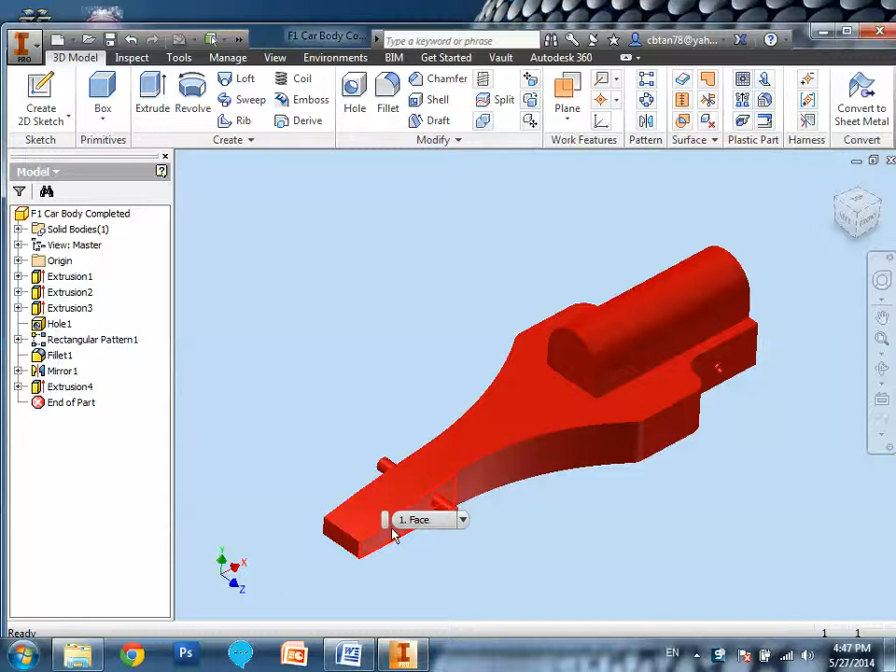Okay, so back to this part 2. We are going to create a front aerofoil and a back aerofoil. So what you can do is this. I think I'm going to create this separately. I'm going to select this surface and create a new sketch.

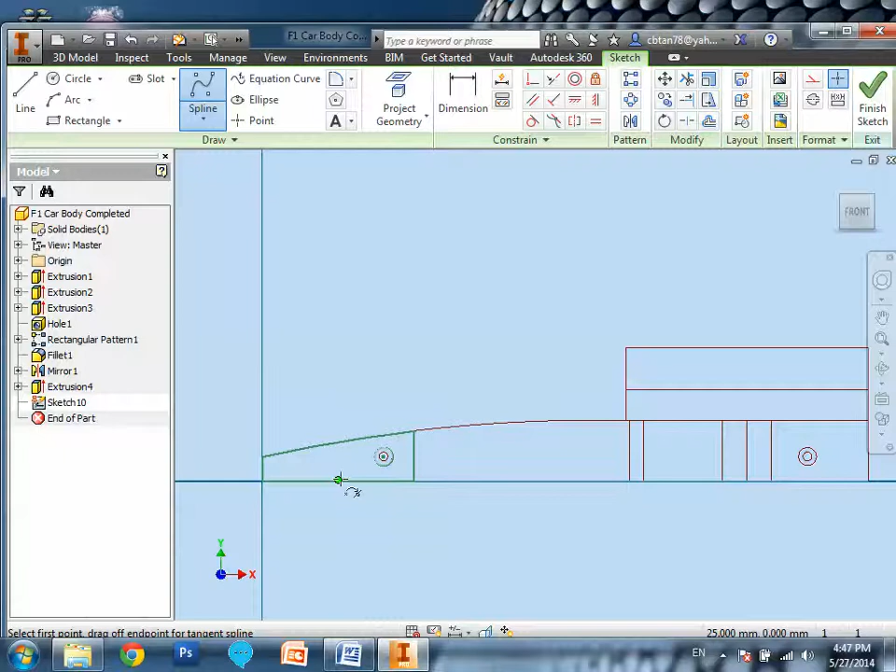Okay, let me go to a transparent view. Okay, now, sorry, let's try that again. Right click, new sketch. Go to spline tool and draw an arc like that. Okay, once you have finished, click on the finish button.

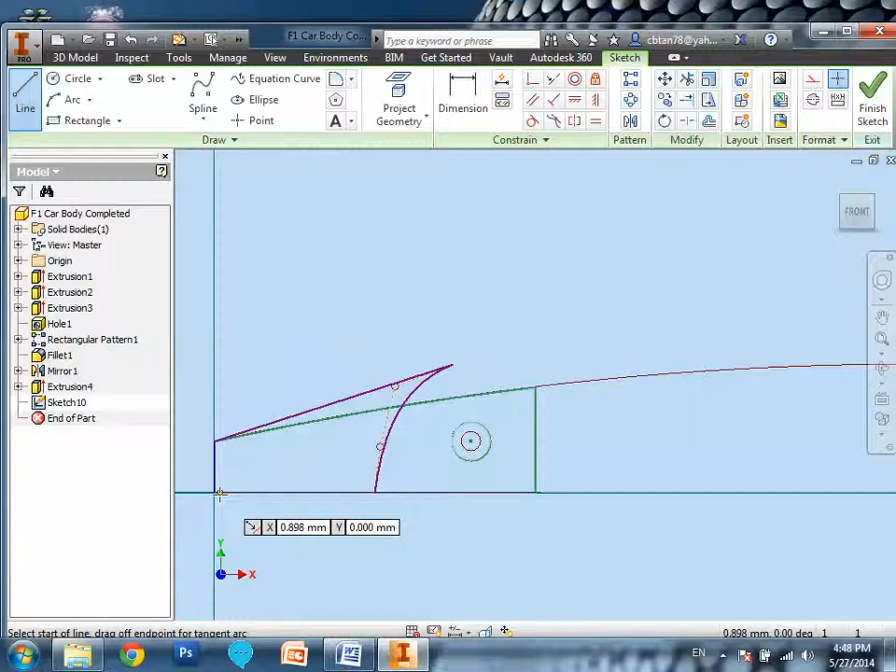Now your shape is not closed. We're supposed to draw this, so you join up to the front here, and back. Okay, oops, this line is not closed as you can see. Okay, once this is done, press the finish sketch and you're ready to extrude.

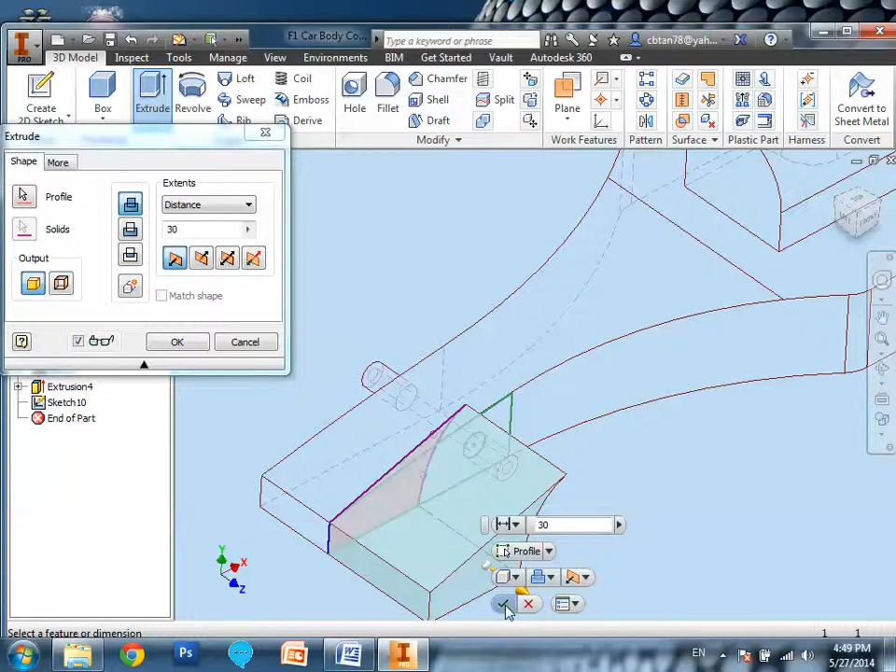Okay, are you adding or are you subtracting? Adding, so make sure this is added. According to the instructions, it says that you must extrude this by 35, I think. Okay, wait, I think it's 20. Let's try 20 or 30. Okay, once this is done, press the green tick to confirm.

Right, next thing, we are going to do the rear aerofoil. So the rear aerofoil, we will have to, let me save my work first. Okay, so we are going to go to the XY plane here, right click, new sketch.

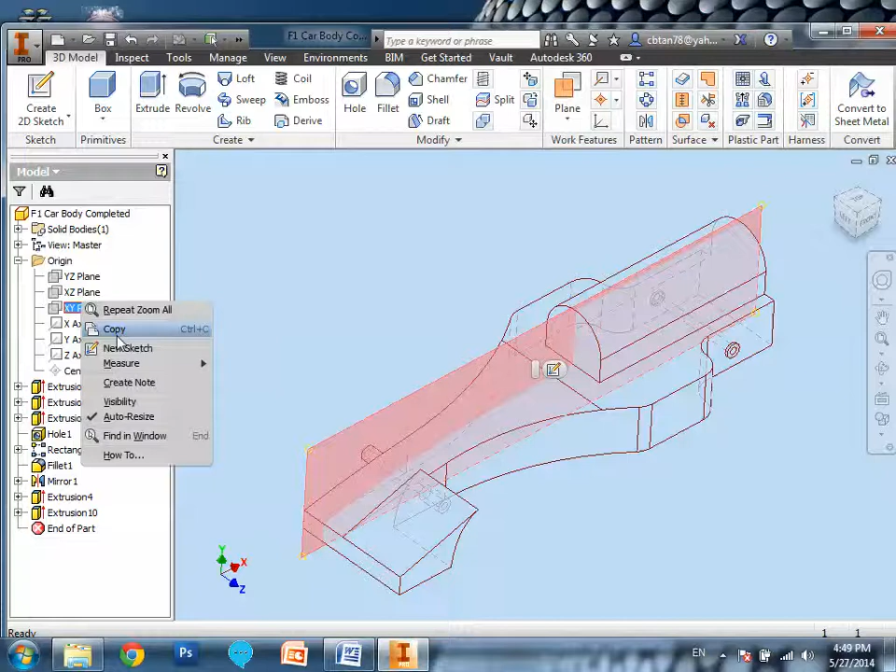Okay, we are going to draw a simple one. We're going to draw just an ellipse starting from here. Just something like that, simple one. Press the finish button. Alright, and we're going to extrude this by 35. Okay, can you see? Extrude by 35. This is 35. Press OK.

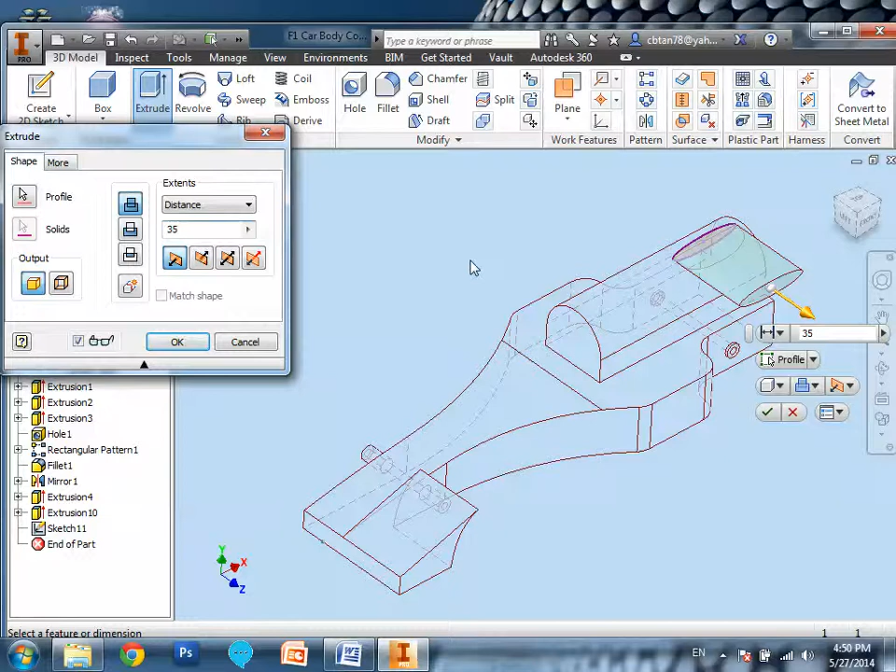Now, of course, you've done it on one side, you must do it on the other side. What's the feature that allows you to do on the other side? Mirror, yes. So go to mirror. Are we extruding a feature or are you extruding a solid? Feature. We're doing a feature. All these are feature. Feature 1, feature 2.

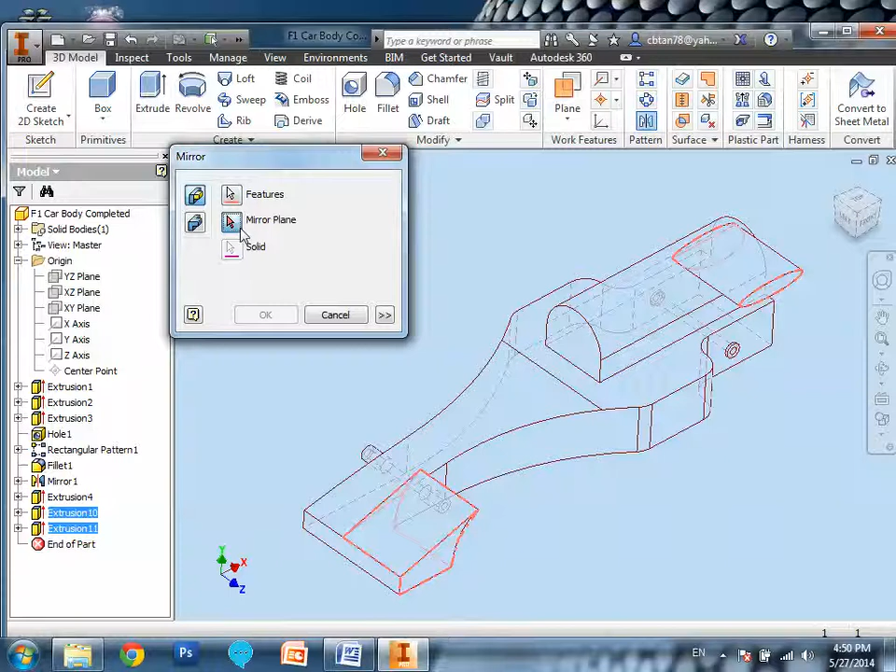Can you see? So you must click on the feature. Sorry, click on the feature. Click on this feature. And this feature. Select the two features you want to mirror. Click on the mirror plane. Where is the mirror plane? This one, right? Click on this and you see your preview appearing. Once you see the preview appearing, you are safe. Click OK to finish up.

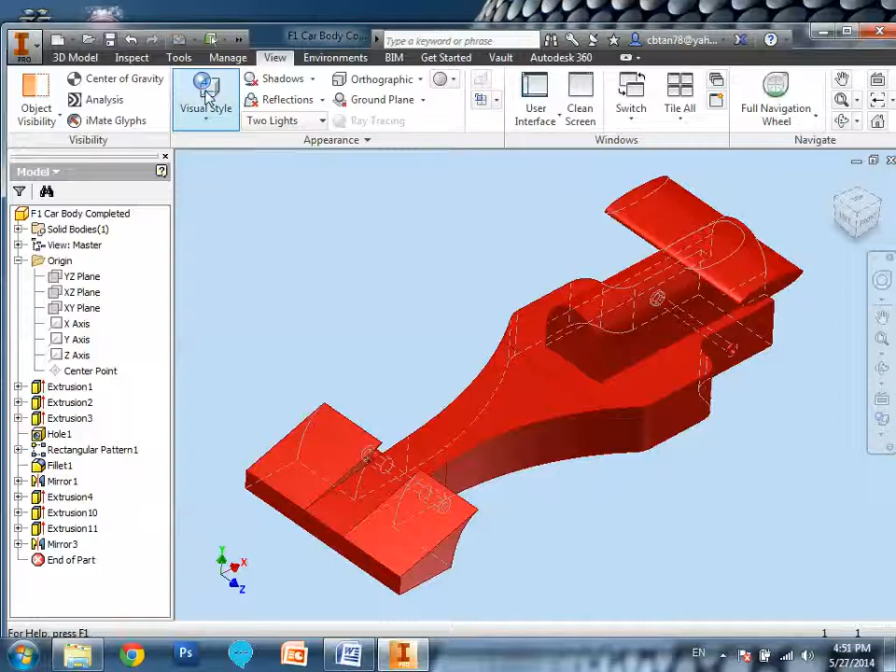Alright? So, more or less, it's almost done. Yeah? Almost. It's not done yet, but it's almost done.

Okay? Last step. We will need to create a little hole behind. Okay, for the canister. You do remember that the car behind has a canister. So go to the back of the car, right click, new sketch, go to circle. We're going to draw a circle.

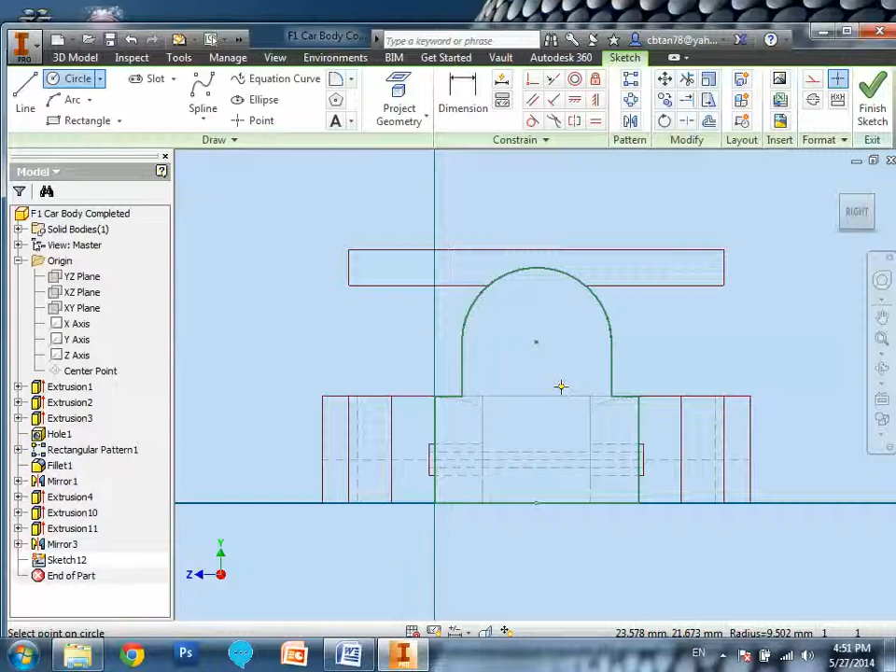Now the hole is a standard size 19 mm. So dimension this to 19. Right? Finish the sketch and extrude it. Are we cutting or are we adding?

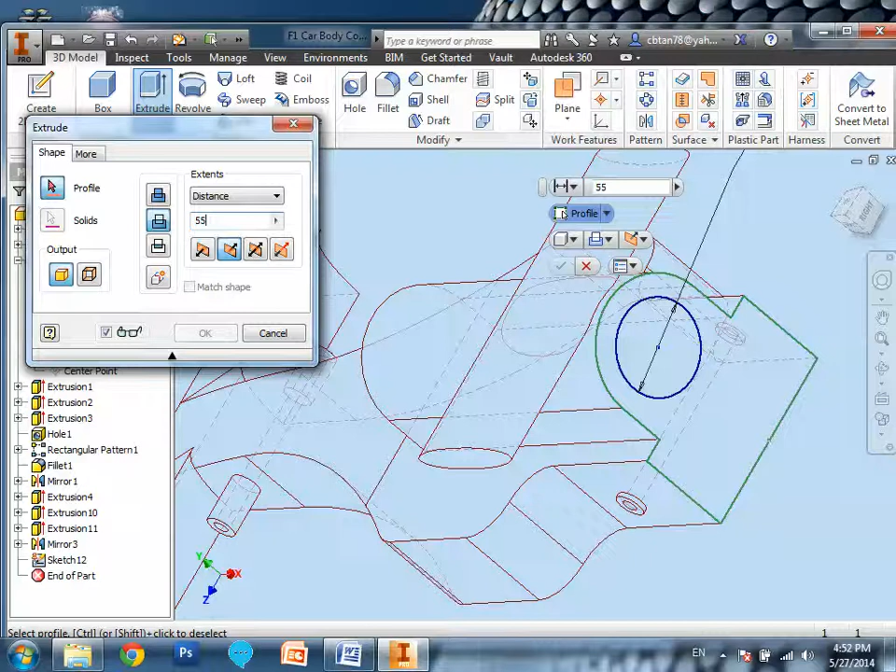Cutting. Now the hole, according to this, the hole is according to my understanding is 55, yeah? Because last time we always do 55. Okay, so you need to extrude this 55 in. Select the part that you need to extrude, then press OK. Right? This is for your canister hole.

Now you look at this. This part is super not aerodynamic, right? If you understand aerodynamic, you look at this. When the wind comes, it's going to knock against this, and then the air is going to be disrupted all over the place. You need to make this slope.

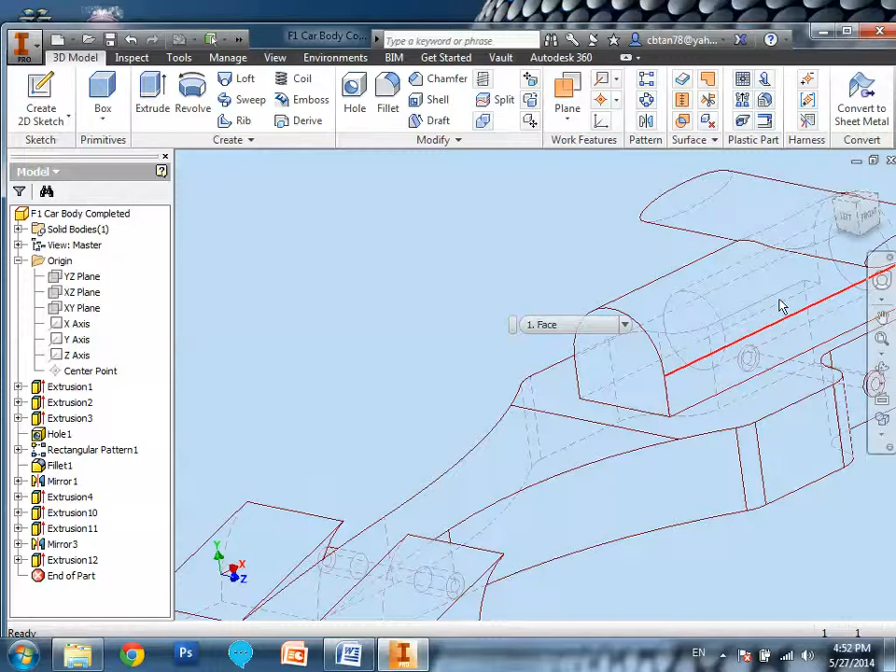Okay? How to make it slope? Quite easy. You can actually go to the XY plane. Go to the XY plane, right click, create a new sketch. Okay? This is what we're going to draw. We are going to draw this, starting from somewhere here. 1, 2, 3, 4. We're going to cut this away.

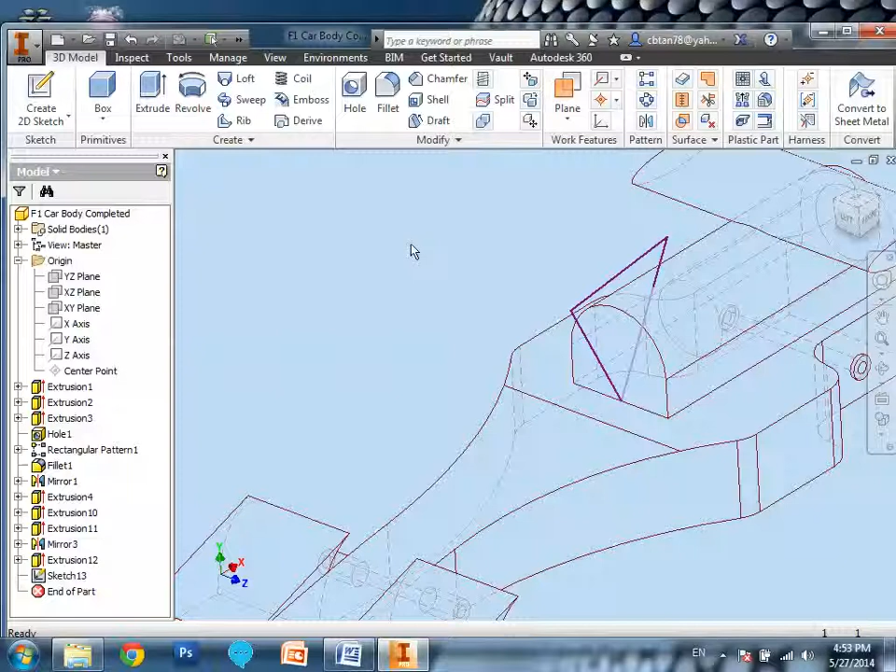Can you imagine what happened when I cut this right-angle triangle away? I'm going to create a slope, right? A simple slope, as shown on page 25. 24, 25. You see 25, first diagram? Page 25, first diagram there? You see the slope there?

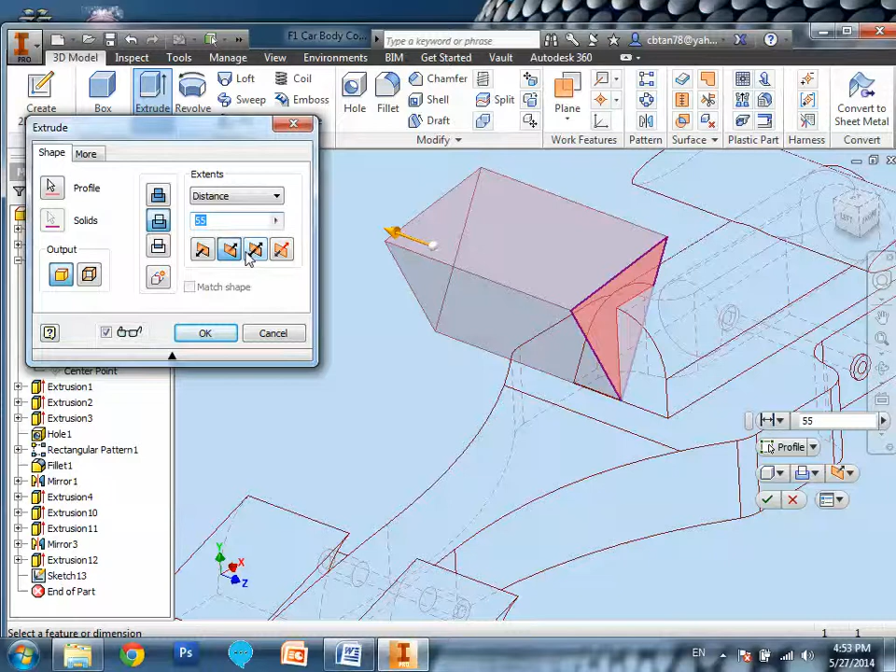Extrude, cut. But you see, no matter how I cut, it only does one side. So if you want to cut on the left and the right, you need to select the third icon that says symmetrical. If you select this, it cuts here. You select this, it cuts here. You select both, it cuts both sides. Press the OK button, and it's cut.

Now, last step. The aerofoil. Now you look at this aerofoil. My aerofoil is a little bit different from theirs.

Right, last thing. Can you see that there's a small little so-called edge there? So that's what we're going to do. We're going to create a new sketch here. If you look, everything follows these 5 steps here actually.

Okay, so let me save my work first before something happens. Just to let you know, my software had never crashed until today. Got infected by some of your PCs. So I can talk, you cannot talk, please.

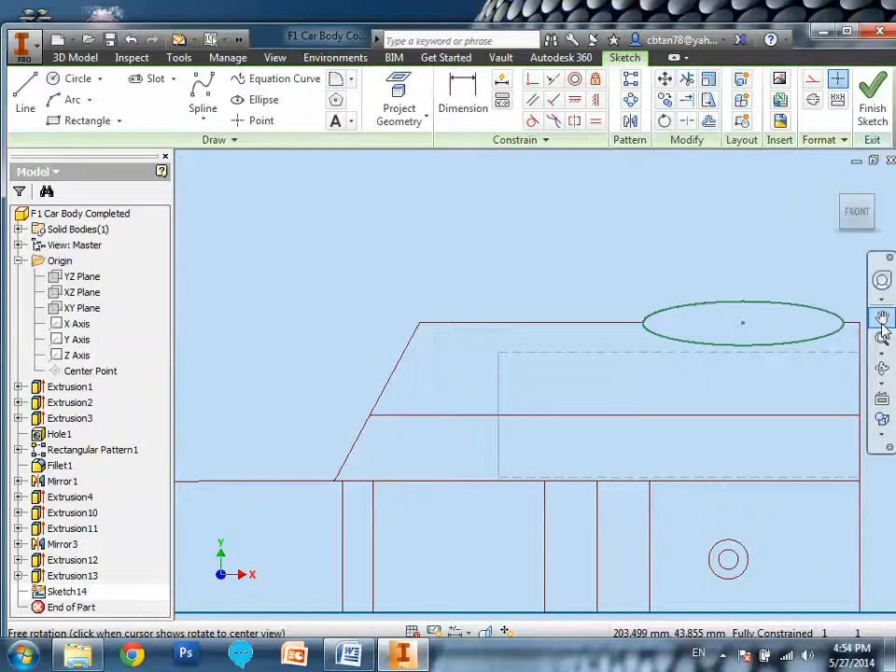Right click, new sketch. What we're going to do is create another ellipse, slightly bigger than the original one. Press OK. What are we going to do? We are going to extrude. Of course, not so big, please.

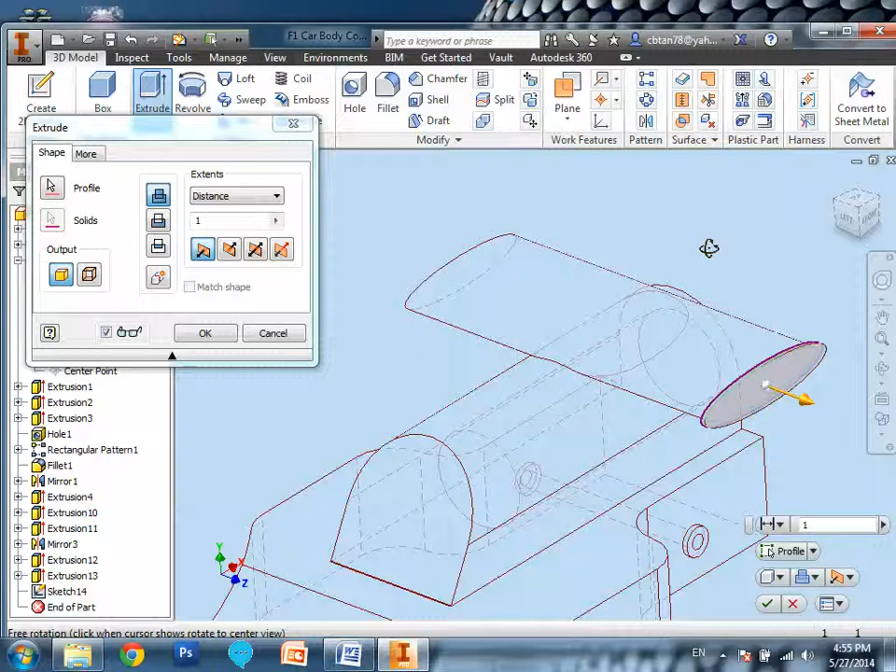It will be about maybe 3mm. Let's try. Maybe too thick. Maybe 2. Okay, 1. Let's try 1. 1 is 1, 2. Yeah, I think 1 looks good. Or maybe just put 2. I think 1 is better. Okay, then you press OK.

That's it. Right? Now, how to be a master? Let's say if you don't want 1mm, can you repeat the process? You can actually go to the last extrusion, which is number 14. Right click on the extrusion, go to edit feature, change this to 2. It will become 2.

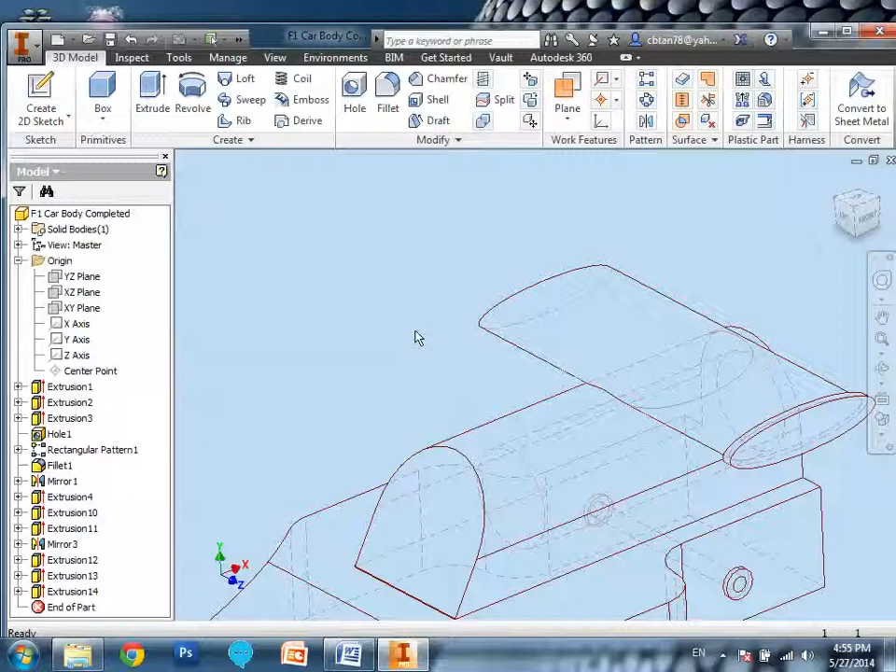Now, next thing, mirror. Same thing, mirror. Are you mirroring a feature or mirroring a solid? Feature, yes. So click on the feature button, click on this feature. Then you tell the computer your mirror plane. Where's your mirror plane? XY. The preview will appear and you press OK to confirm it.

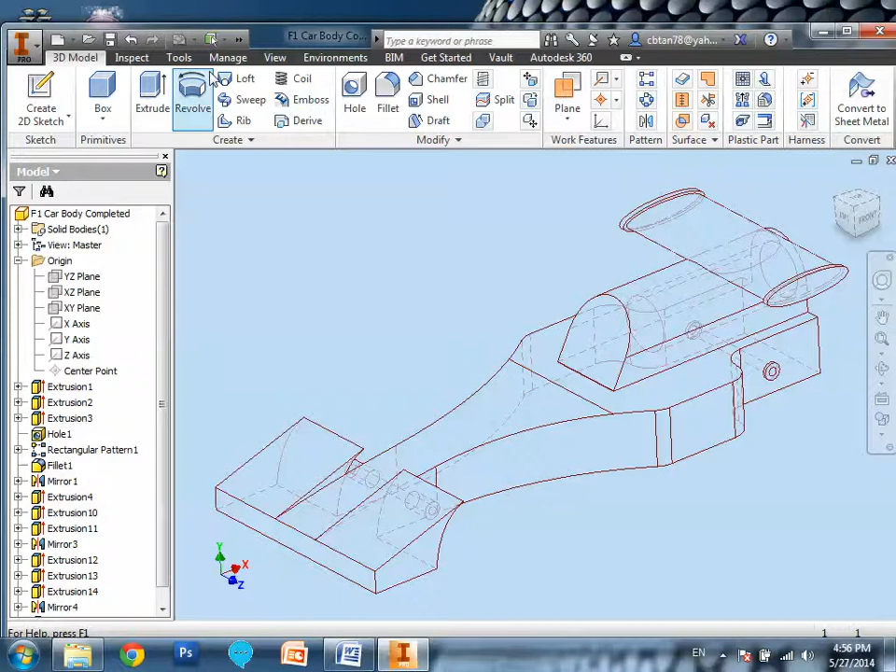Okay, so it's almost done. Now, next thing, last thing, we are going to do some rounding. You know that rounding is the one that turns your car from something very crude and rough looking, to something very realistic. So that's what we're going to do. We're going to go to 3D model, fillet.

This one closer. For example, you can round this edge. This one, let's round to maybe 5. Let's try. Can you see? I turn it from a very rectangular edge. Can you see, it is very rectangular-ish, very ugly. Go to fillet. This edge and this edge. Change it to 5.

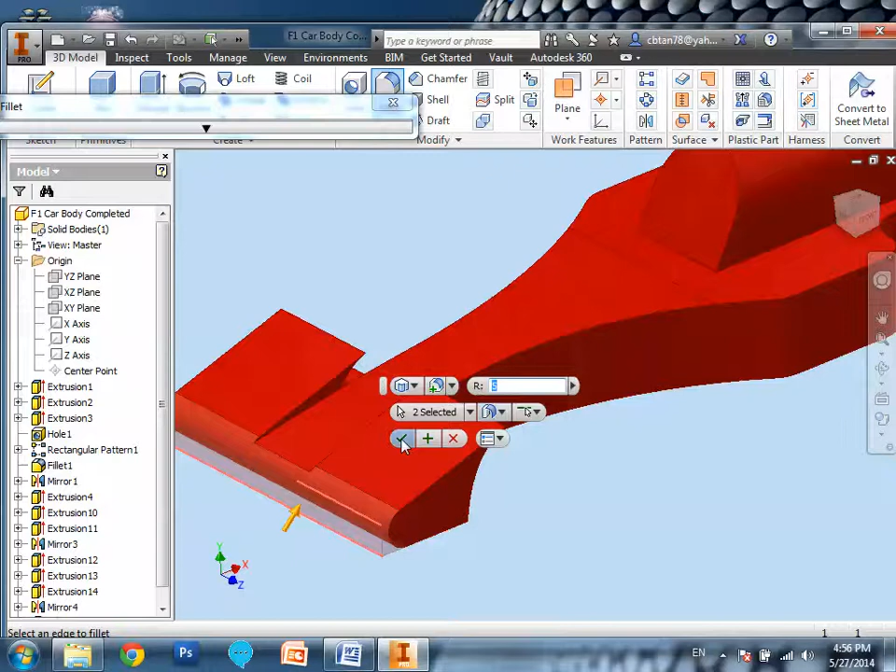It all depends. Next one, maybe this one is also very sharp, I don't like this part. This one and this one. This is maybe not 5, maybe 3. Let's try 3. Maybe 2. You can try the values and see. Okay, something like that.

What other surfaces? Maybe this one. This is too rough. You can go to fillet. This edge and this edge. Can change this to maybe 5. Let's try. Round the whole edge. Can you see it looks better now, like we have the rounding.

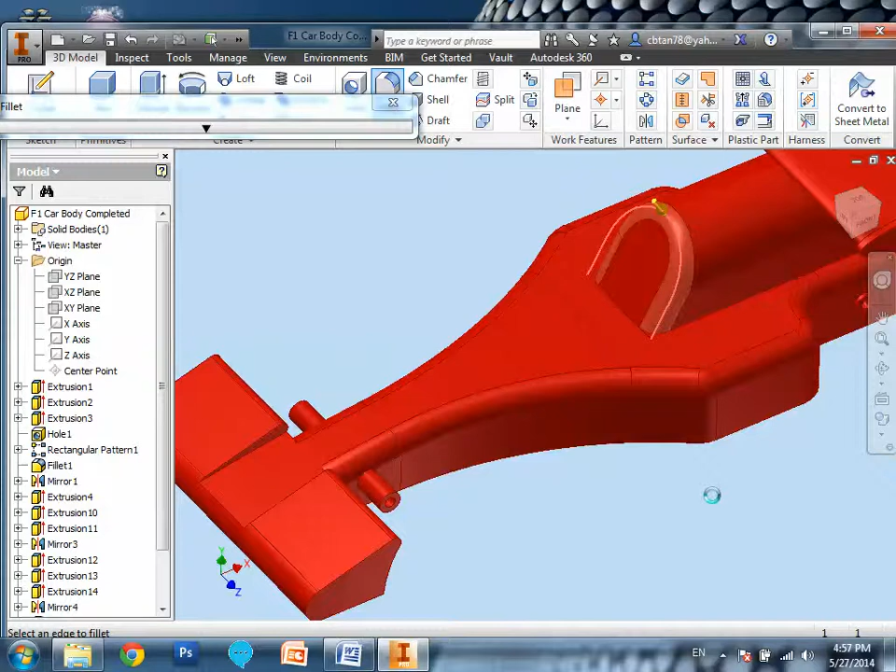Okay, next one, maybe you can round this edge here, this one. Okay, you see, it's rounded now. This one also can round, I think. Yeah, this one, because your job is to make sure that this part actually curves nicely, right?

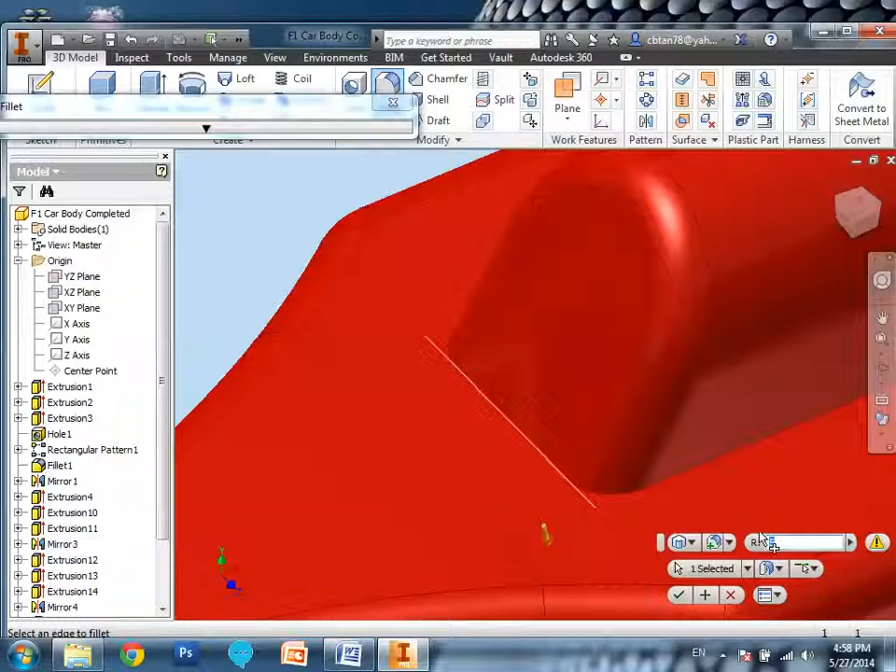Let's try again, this edge. Let's try 50. It might give me an error, I don't know. Yeah, got error already because there's a problem. Now if you get an error, please don't carry on, okay? You must make sure that there's no error here, please. If you have an error here, we're going to have a problem.

Alright? Okay, so the car is done, something like that. Now I'm going to save my work now.

Okay, I'm going to go to the adding of decals, something that is also important. Last year, SolidWorks, you also add the decals, right? So today, I'm going to also teach you how to add the decals. SolidWorks, if I'm not wrong, cannot add in your own decals.

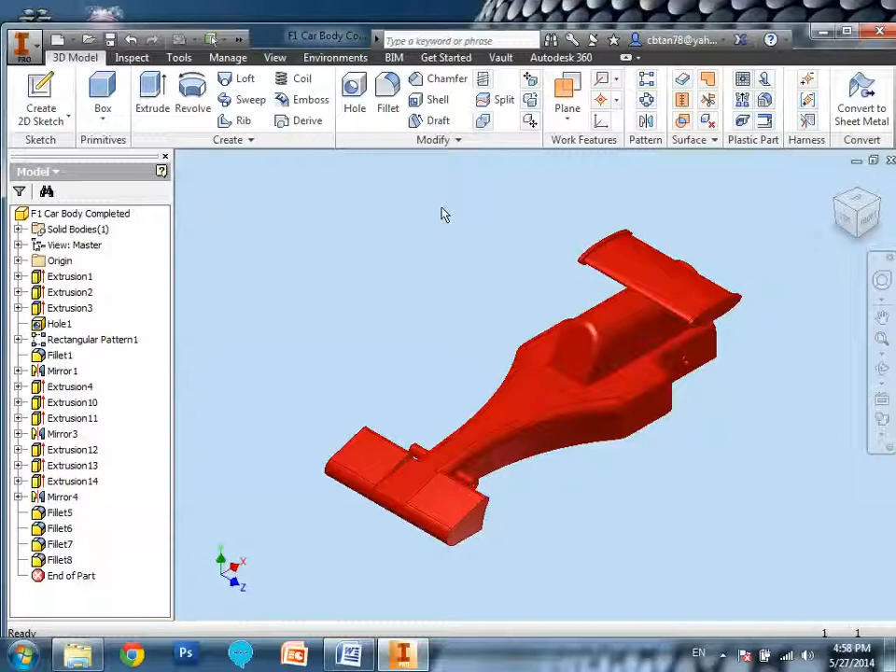How to add in your decals? First, if you want to put a decal here, on this edge, what you can do is a decal will be added to a new surface. So right click, new sketch.

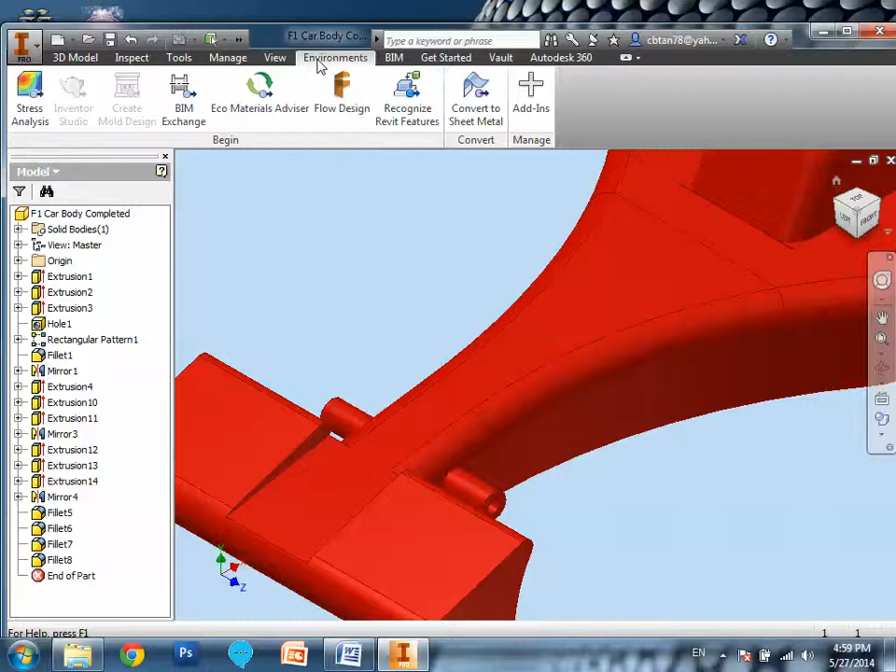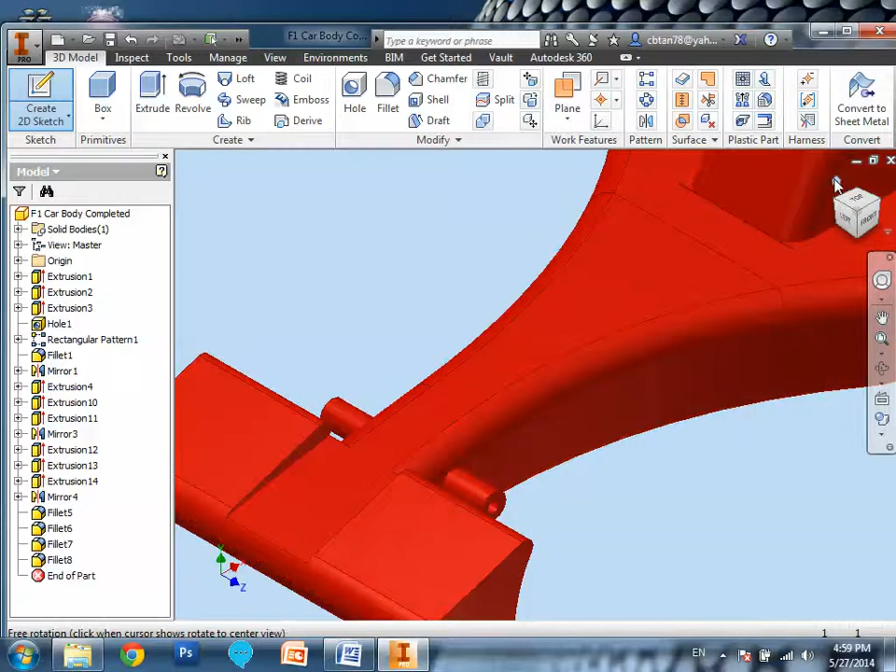That's it. Where is it? Yes, here. Wait, have I created a new sketch? Right click, new sketch. Let me save the work one more time. Right click, new sketch. Okay, yes, because I need this new sketch to appear. If the new sketch doesn't appear, we have a problem. Do you know why you cannot create a new sketch on that surface just now? Anyone know the reason? Why is it I cannot create a new sketch here, but I can create a new sketch here?

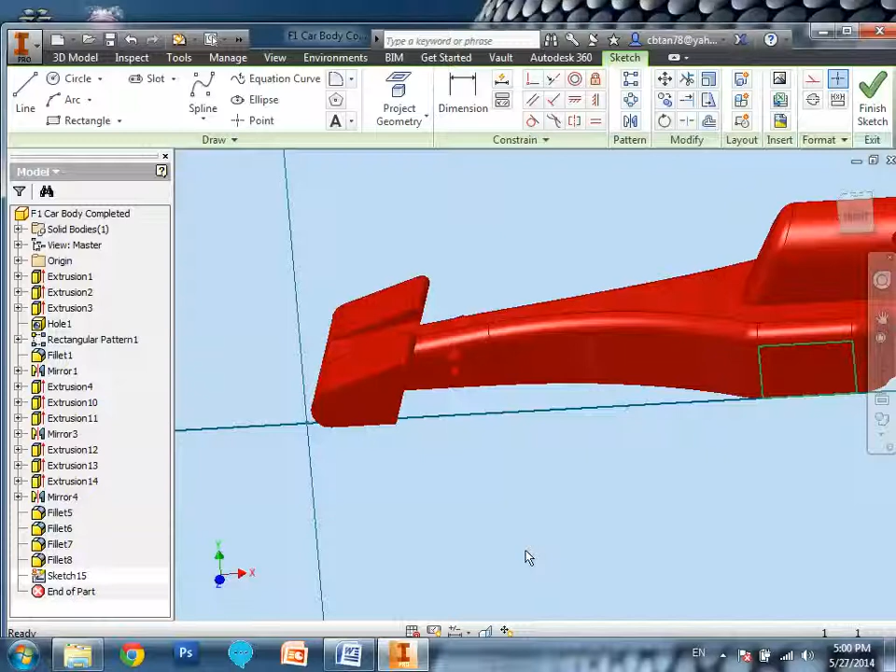Because this surface here is not flat, it's actually curved. That's why. Okay, anyway, we already created a new sketch.

Now it's time for us to insert an image. Where is the image you are supposed to insert? Where is the image? Oh, okay, you're supposed to... sorry, we already finished the car already. I'm still recording, still in record mode. I'm supposed to insert the image, but I'm still finding it. Wait, how to insert the image?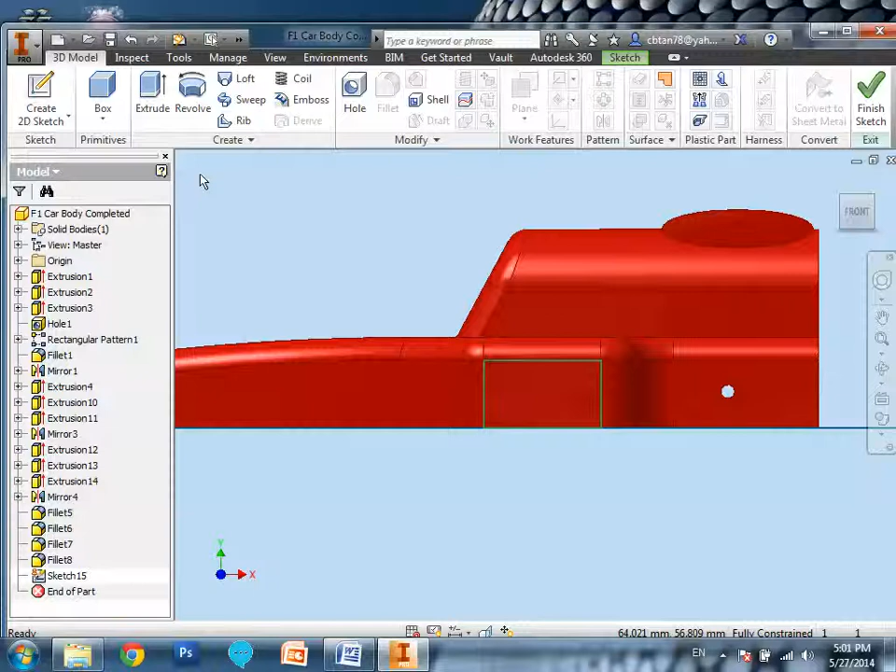Okay, hold on, let's try again. Yeah, I think it's here. Okay, yeah, sorry, here, this one? After you create a new sketch, click on Insert Image. Select any image that you want, any image, yeah. For example, I'm going to insert the F1 in Schools logo here. Click Open, put the image there.

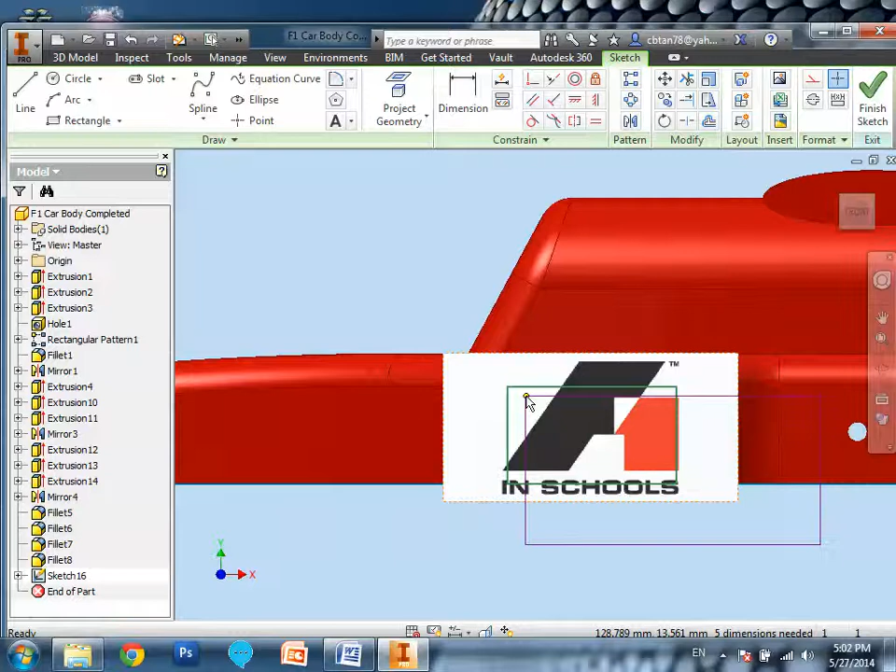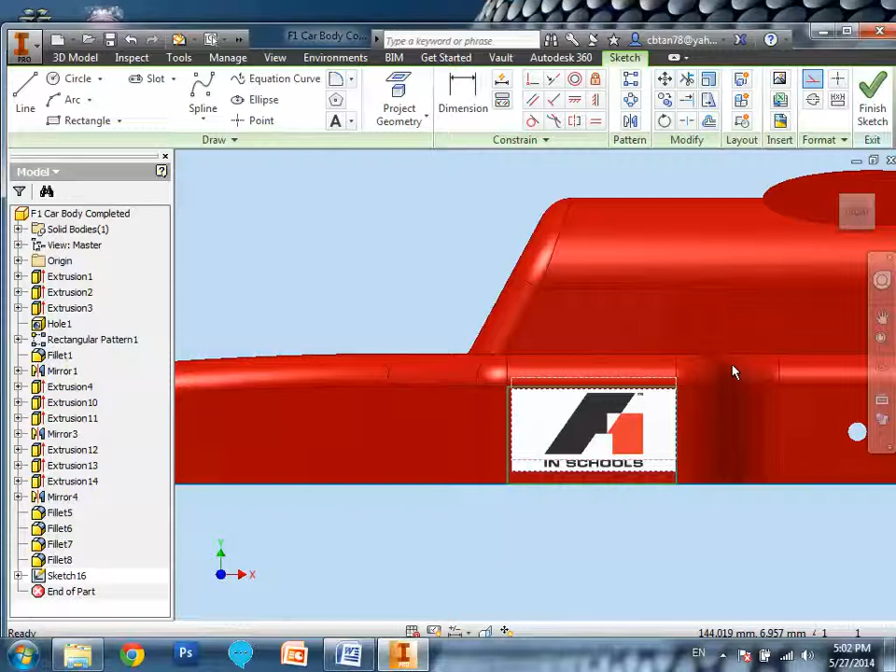Then press Escape, because every time you click it will just insert many images. So click on this, drag it smaller. Oops, okay, you need to be very careful here, you need to make it smaller. Then you pull the image to the correct place. Oops, you need to drag it in a very careful manner. Once it's done, you press the Finish Sketch button.

Okay, now I'm going to try again for this one. Create a new sketch. Insert an image here, we're going to insert the Autodesk logo. Okay, just put the logo down. Now you see, if you press again, another image will come, so don't keep on pressing and pressing. Press Escape, this one don't want. Click the image and press Delete away.

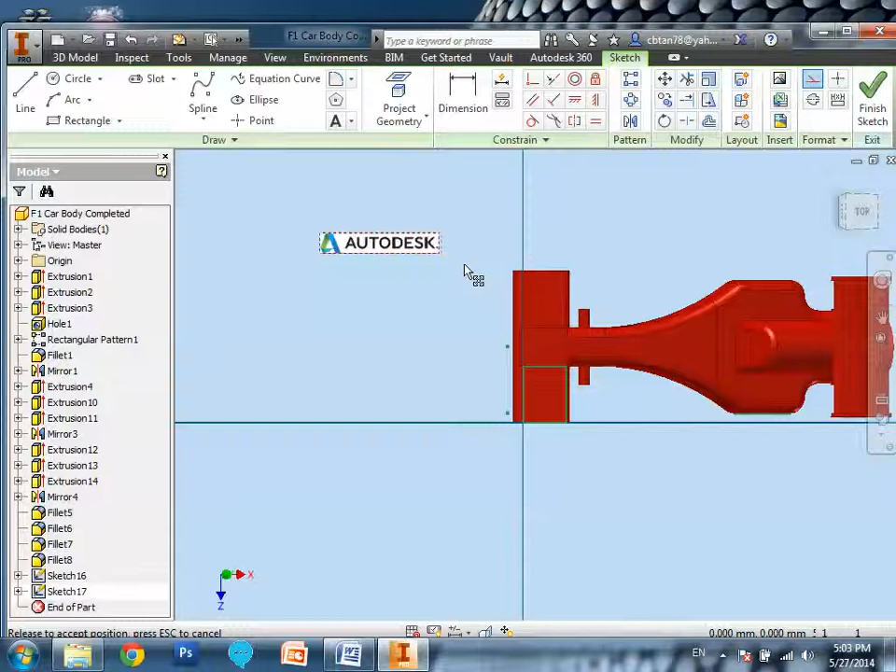Now we are going to rotate this. I'm sure you know how to rotate this, right? Just click the corners, make it bigger, shift it here. Too big, right? Wait, what happened? How come cannot change the size?

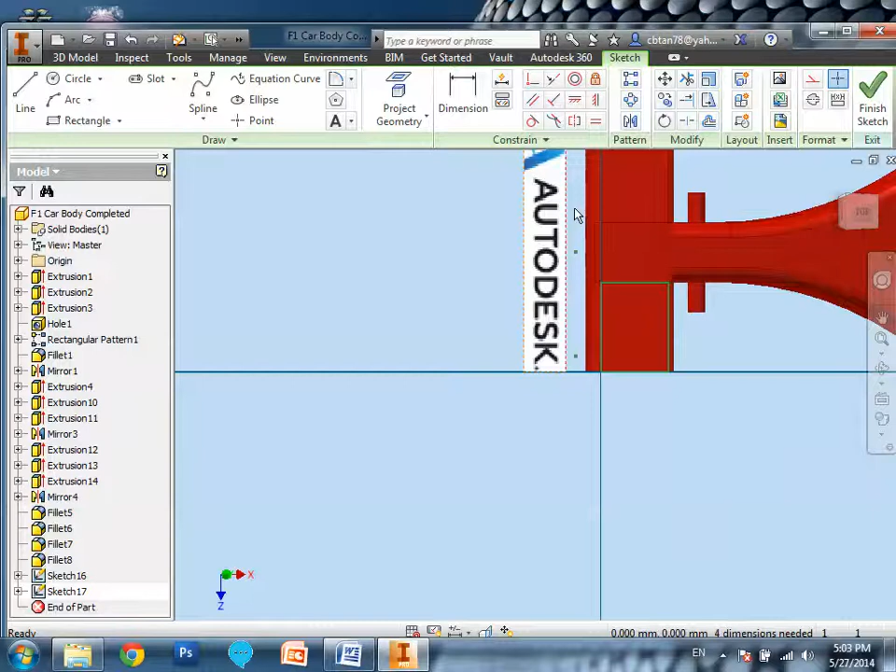Okay. Yep, I think the image is a bit crooked. Is it? Okay, let's try again. Sorry, let's do the image one more time. Yep, I think it's around this size, right? Or not? Around this size, yeah? Let's put it over.

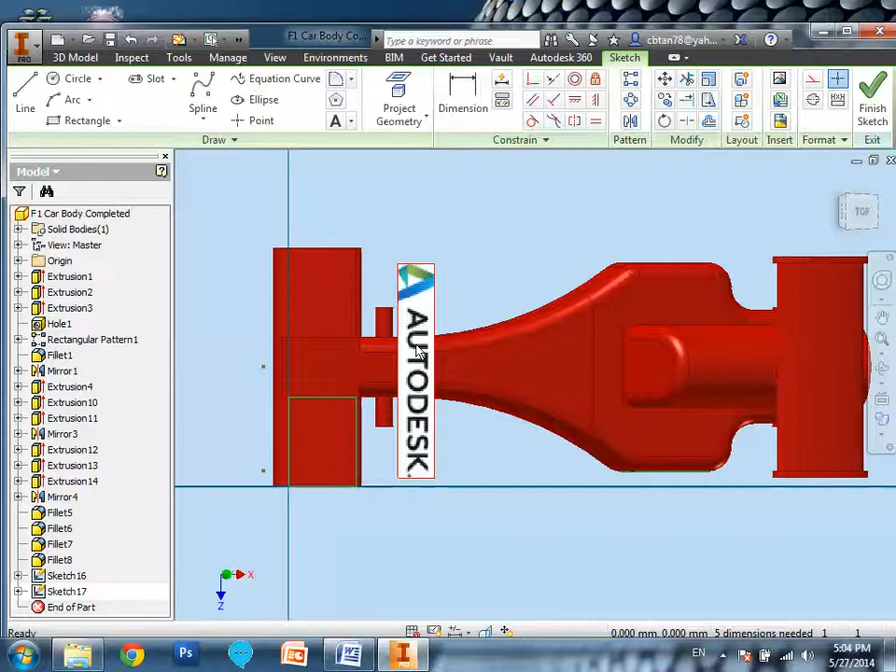Press OK, that's it. It will blend according to this surface. Okay, so this is about inserting the images. Okay? Right?

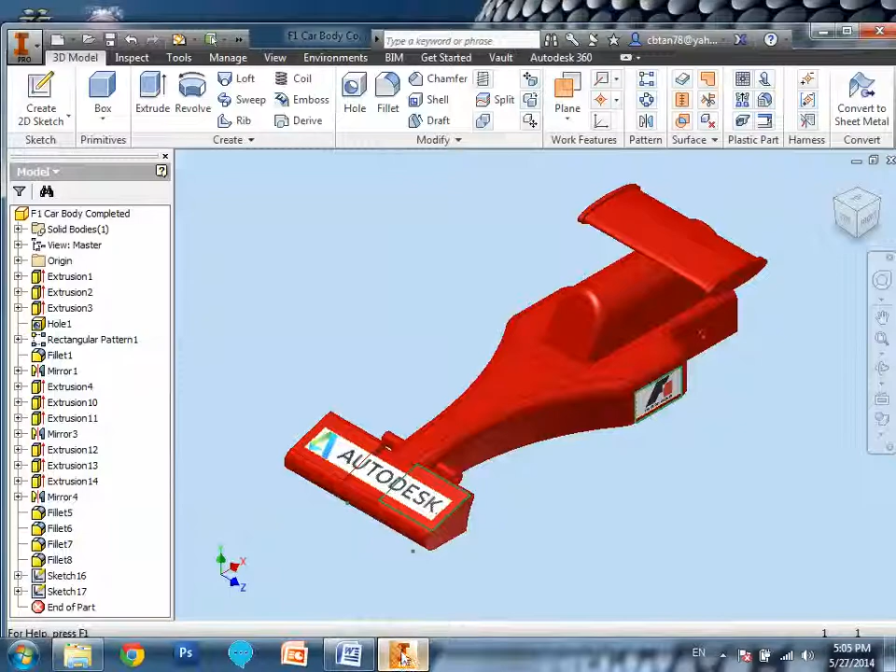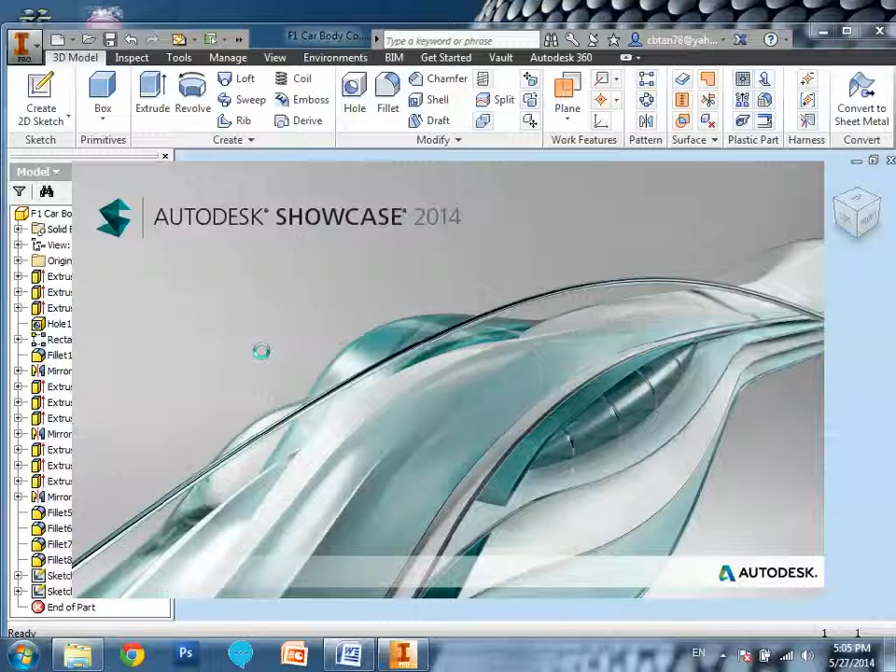Now the next thing is about the rendering. The rendering is also important. How to render? Now the rendering software, it's a standalone software. Mr. Chai, just nice, the rendering software is a standalone software called Showcase. It's under Autodesk, but you need to download the thing. Showcase, so under Autodesk, Showcase. Yes, because by default it's not there. No, student - I also using student version. You just download and install.

Because if you want to win, then you need to do this. Because the other schools, the newcomer schools, most of them will just get a car and that's it. But if I don't use Autodesk, they cannot. They can - if you don't use Autodesk, you can still take one. Because what we print, they don't know it's Autodesk.